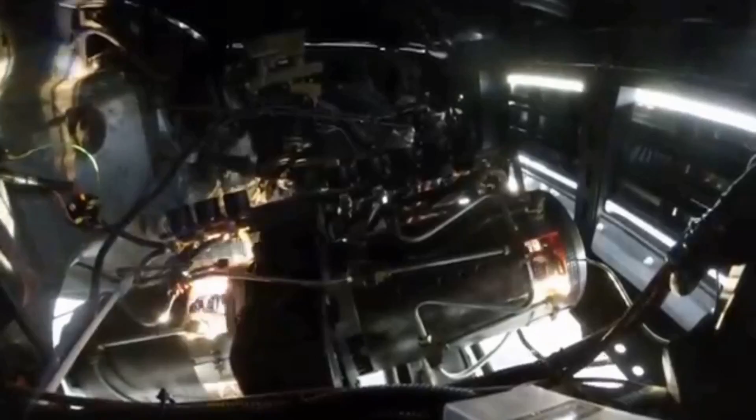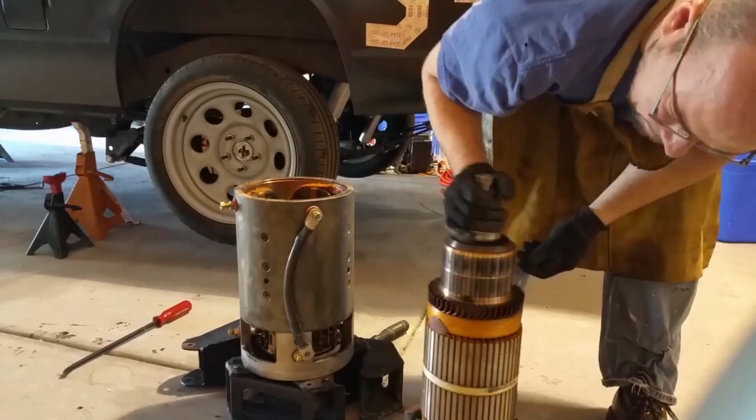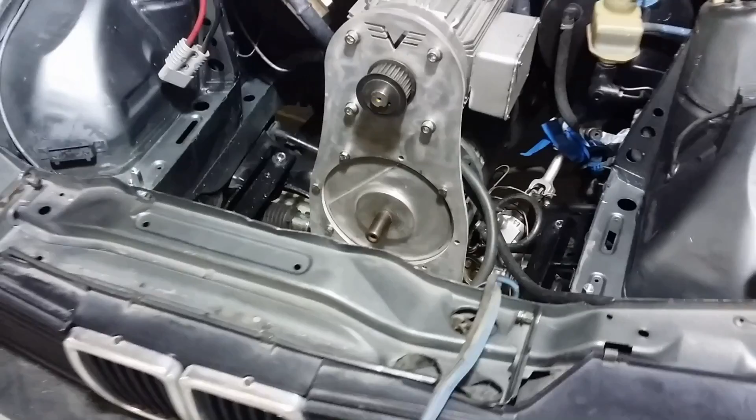Up to 600 volts. Motor repair, take one. These 4 bolts here. That shaft moves this lever. It's alive!

All right, it is here. It's a Challenger 1 long wing. Originally designed as an ultralight. This one has the 503 Rotax on it, which is a 2-stroke. I think it puts out about like 54 horsepower, somewhere around there.

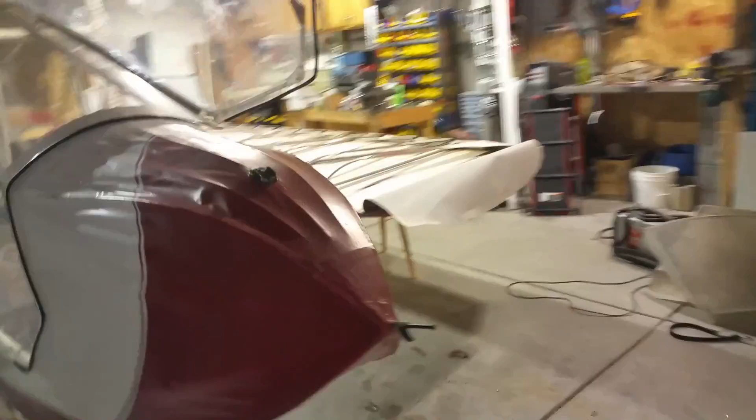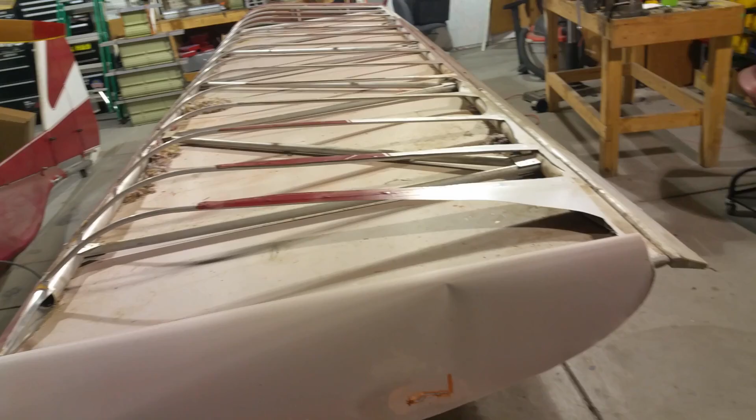Yeah, well, it's not an ultralight with that motor on. It's supposed to have a 277 if I remember right. But yeah, it's here. So put one wing up there for right now. Gonna work on this one first. Definitely a barn find. This wasn't a do a few things and get it running type situation. This is a complete teardown.

And actually I will be doing that. I'll be tearing it down to where it was as a kit and then building it back up. So all the coverings coming off. I'm gonna definitely put it on a diet. I'm gonna take off the windscreen, the doors, not gonna put that on. Obviously I'll go into electric, but I'm going to keep the 503 because I might use that for a hybrid, which is going to be a later project.

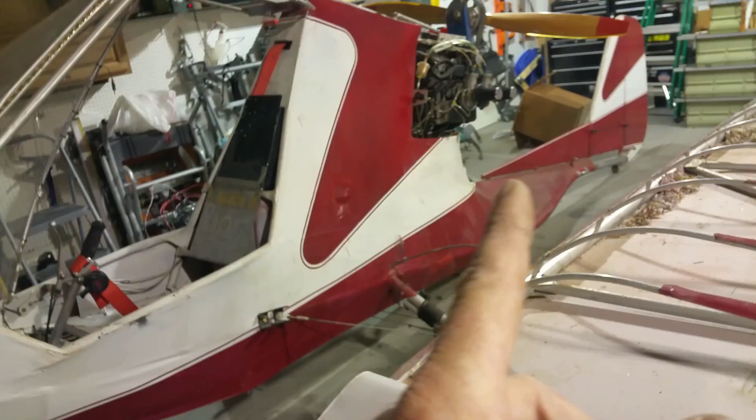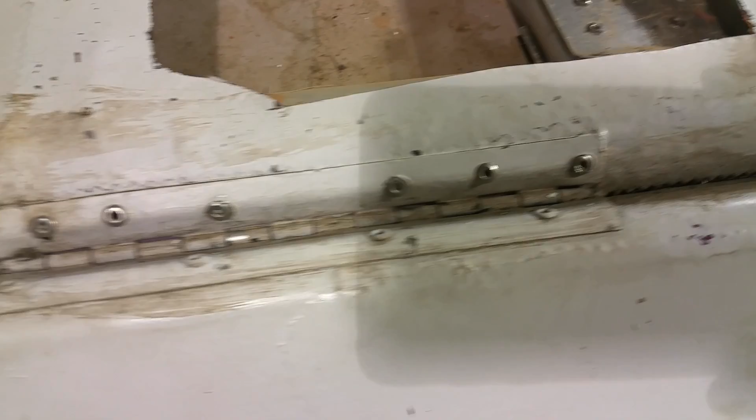This is the first step. I've got the HT back there, actually an elevator. I'm going to pull all of this off, just strip it down, do a full inspection on it. Some of it's, you know, factory drilling, riveting looks fine, and then there's other stuff where, well, not so fine. So I'm gonna put my DER hat on, as it were, and look over everything.

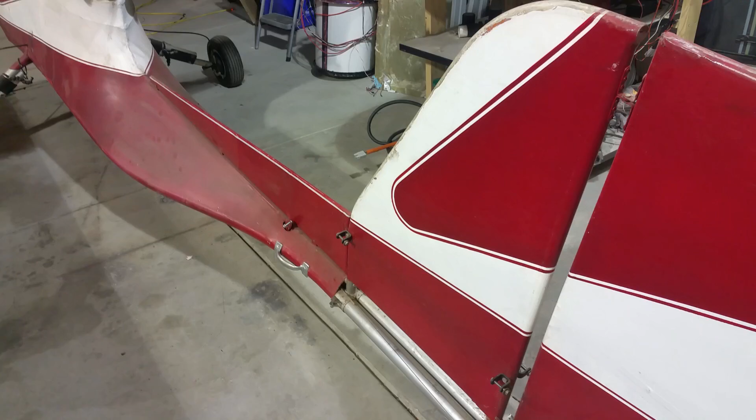Obviously this has been in a barn for a very long time, and well, rest in peace, buddy. But anyway, it looks like a POS because, well, it is a POS, but you know what, it's my POS. And I'm gonna strip it down and turn it into something better.

All right, so there it is. The surprise is unveiled. My next electric vehicle conversion video is going to be about me converting a Challenger 1 ultralight into an all-electric aircraft. This is a project that I've been wanting to build for probably around a decade now. Part of the reason that got me interested in electric vehicles to begin with, my full-time job is designing airplanes, and I wanted to build an electric one.

But especially 10 years ago, the technology was very out of reach for the average person. When I did my first conversion back in 2009, I did lead-acid batteries. Don't need to tell you that lead-acid batteries don't make an electric airplane. But I've done the past 5 conversions with the idea of building up to the point where I can have the confidence that I'm going to build an electric airplane and not catch on fire or crash or otherwise have regrets.

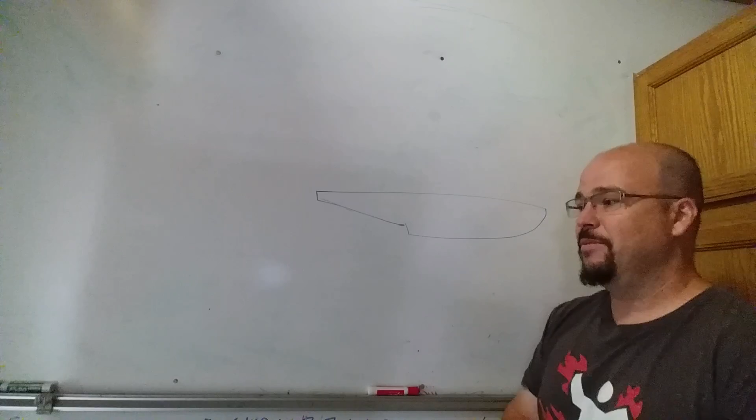I've always had a soft spot for seaplanes. I've designed jets. I've designed prop planes. I haven't ever worked on a seaplane. So again, for me, these builds are about doing something fun, but it's literally the build process, not necessarily the ends, but the means to get there.

So yeah, I want to do a single float plane, parasol wing, and the big thing is I want distributed electric propulsion. That's one of the big things that I want to test here, and why I want to go through that with a known airframe. The Challenger 1, I think something like 1,300 of them have been built. They're a known aircraft. They have a few quirks, but definitely much lower risk than me trying to design and build my own airframe.

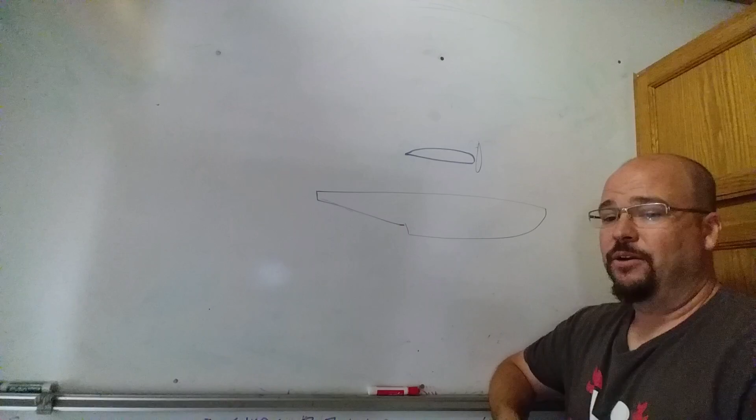Not to mention time. I've done a scratch-built fuselage before, and it takes a while. Once you start adding a lot of things together, the project can seem daunting, and that's where a lot of projects just end up dying.

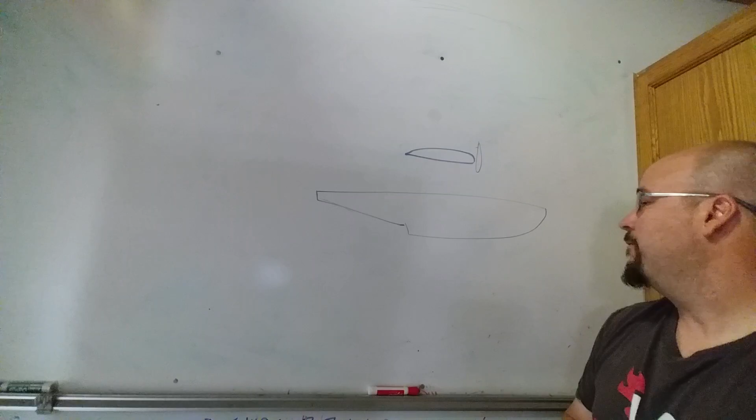So anyway, back to that. So I want to do a float plane design, conventional tail, distributed electric propulsion. For those not familiar, distributed electric propulsion, again, is not a new idea. We have a series of motors and propellers along the span of the wing. You do this for a couple reasons. One, it's actually very easy to integrate into non-conventional designs.

By having the motors out all on the wing, you don't need to have a space for it on the fuselage. In a traditional tractor configuration, you'll have an engine and propeller up front, or in the case of an electric conversion, a motor and a propeller out front. The Challenger 1 is actually a pusher, so it has a unique airframe design specifically to give you a place to put that. By going to this method, it gives an aircraft designer a lot of freedom on where you can put it. That's also one of the nice things about electrics, is that you're not dictated.

When you start designing a piston engine aircraft, for instance, or a jet engine, you'll figure out where the location of the motor is going to be, and you start working from there, because that is by far the single heaviest item on the aircraft, and it really drives the design from a weight and balance standpoint. Electric motors, these motors are very, very light. Again, this is a 2 horsepower motor. I'm going to be running about 12 of these.

Really, for an ultralight, I can only have a certain amount of power, at least for the way it's written. For those who aren't familiar with the ultralight regulations, this will be a Part 103 aircraft. It limits me on empty weight, power off stall speed and maximum cruise speed. I'm going to say the numbers, but I'm probably saying them wrong. If I remember right, it's 24 knots for power off stall and 55 knots for maximum cruise speed. Don't quote me on those. Look up the FAR regulations.

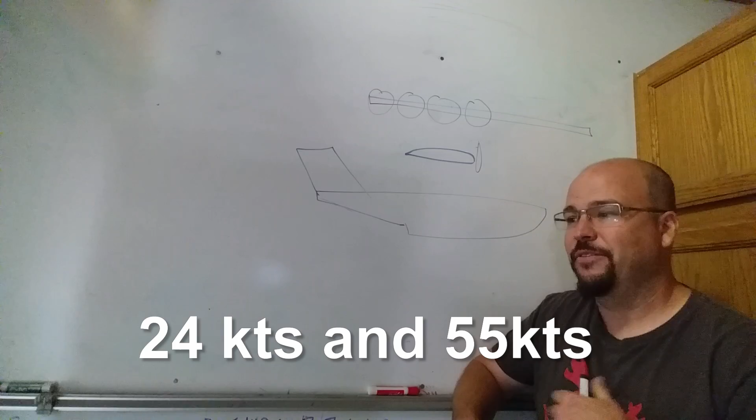The empty weight has to be less than 254 pounds. That's without fuel and without pilot. It can only have one pilot on board, no passengers. So that and a few other things are the requirements for operating as an ultralight. Ultralight gives you a lot of things that you don't have to do. I don't have to register it and N-number it. I don't have to meet some of the operational requirements. This won't have a 30-minute range, for instance. Probably looking at about a 20-minute endurance.

With a standard Part 23 aircraft, you have to have 30 minutes of reserve fuel on board, so I would never be able to take off if I operated it as a pure electric single-engine land aircraft. If you register as a motor glider, there's ways around that, but that's not what I'm looking at right now. So doing electric propulsion for a lot of those reasons.

The other big one, and it's probably the biggest one, is that you are blowing air over the wing. A wing makes lift by air going across it. The wing doesn't know whether it's being dragged through the air or you're blowing the air over it. Think of a wind tunnel. In this case, by mounting all of the propellers along the length of the wing, it's called a blown wing. You're blowing air over it, so you can make significant amounts of lift at 0 airspeed.

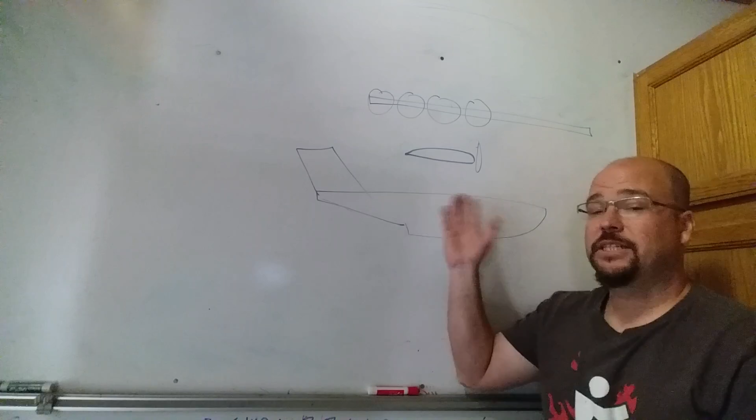Now, I'm not trying to do a crazy vertical takeoff, quadcopter, etc. This is going to be a simple fixed wing configuration, but by doing this, it gives me very short takeoff and landing performance. Now, the Challenger 1 is no slouch. I think with the 503, if I remember right, it's like a 350-foot takeoff roll. That depends on who you're talking to, and those are numbers from the internet, so take them for what they are. But I should be able to get significantly lower than that with the blown wing.

Again, this is not a new concept. NASA's been doing it quite a while, working on their SCEPTOR. Actually, now they call it the Maxwell. They're going a different route. They're going to a very small wing, because when you do a blown wing, when it's powered, it gives you a very high coefficient of lift. You can get CLs in the 6 to 8 range, depending on power and other installed factors,

which is a very, very big improvement. Going to a smaller wing reduces your cruise drag, but the problem is the wing gets small; it's hard to fit things in. But the biggest thing is if you have a power out situation, then you don't have that blown condition anymore, and so then you have a higher landing speed.

Here again is ultralight going. I want it to be safe. I'm going to be flying it. So if there is a power issue, again, the power off stall, I have to have a power off stall that's in the 20 knot range.

So if I do have some sort of propulsion related problem, it makes it a much safer event, because obviously I'll be doing this in an open, unpopulated area. I can just land if need be. Obviously, do everything I can to make sure that event doesn't occur.

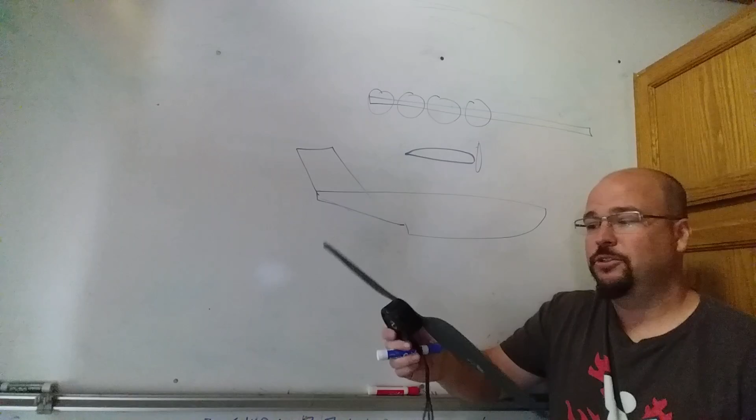The nice thing about using these is they're actually made for agricultural drones. These aren't RC airplane motors, though some people do use them for that purpose. The nice thing about it is that these are made in high volume, so the price comes down significantly. I think these are on the order of about $100 for 2 horsepower. So that means for the 20 horsepower that I want, I'm looking at about $1,000.

You need to add propeller and ESC, but that would apply regardless. So I looked at other options for doing like just 2, 4, or just a single motor, and it just didn't work out for various reasons. So I'm going to be testing these motors, as well as a whole host of other ones in a future video. But assuming that all that works out, I'll have anywhere between 10 and 14 of these motors distributed across the wing.

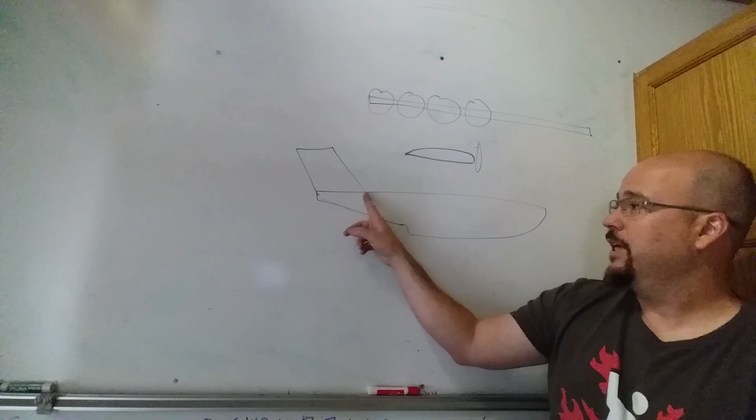Also, I'm span loading that weight on the wing, which takes some of the bending moment off. Again, these are pretty light, so it's not a huge factor. But anyway, I want to build an ultralight seaplane, but why do I have the Challenger? Well, one, I really bought the thing because I wanted the wings and I wanted the engine and propeller for a later hybrid project.

I bought it for the cost of parts, and honestly, what I got is pretty much worth those parts. It has been crashed and repaired and crashed and repaired again, and probably crashed at least another time in there. There are bent landing gear, bent struts, buckled tubes, dimpled tubes. There's a whole host of problems there. I'm still on the fence about whether or not I'll fix up that fuselage because it has so many things wrong with it. But again, I'll get into all that in a whole other video.

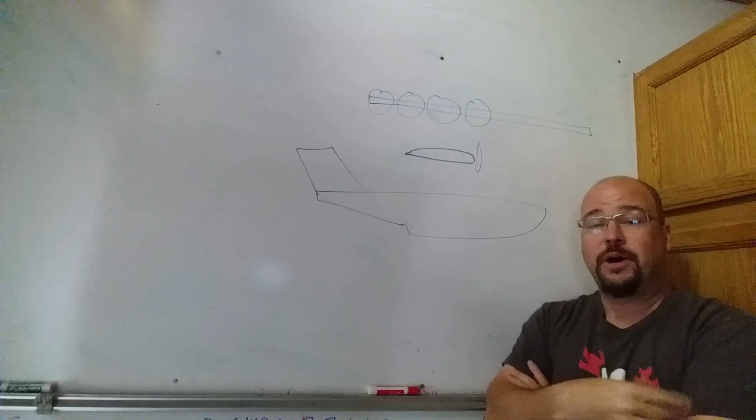But so I got this Challenger 1. Why I'm using this: later on, I'm going to be building my own fuselage, moldless composite construction. But there's a couple issues with that. One is I don't want to be doing initial flight testing off of water if I can avoid it. That literally adds a whole other element that it wouldn't be good to do for such an unknown aircraft.

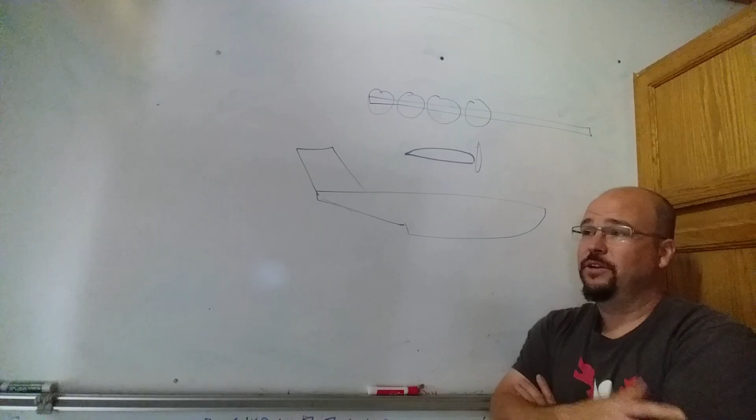The other is a practical standpoint. Colorado is the only state in the union that you cannot land or take off or operate a seaplane off of public lakes. Every other state you can. In Colorado, it's not a law. Someone just made up a rule, I guess, back in the 70s or 80s, and it has been with us ever since. There's a couple of private places I could do it, but it very much limits me being able to operate.

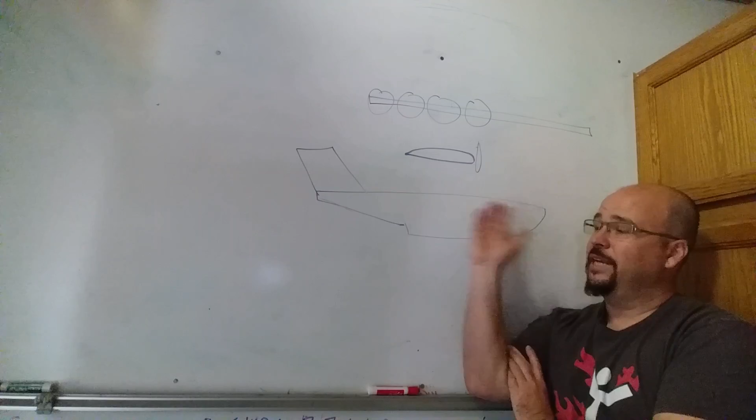And then the aforementioned, really I want to just be able to do the flight testing with a known aircraft. Really here I'm testing the electric propulsion system. Then once I'm confident with that, I will take out the Challenger fuselage, build up this, and I'll have my final end product. But that's not what I have now. So what I have now is going to be a Challenger.

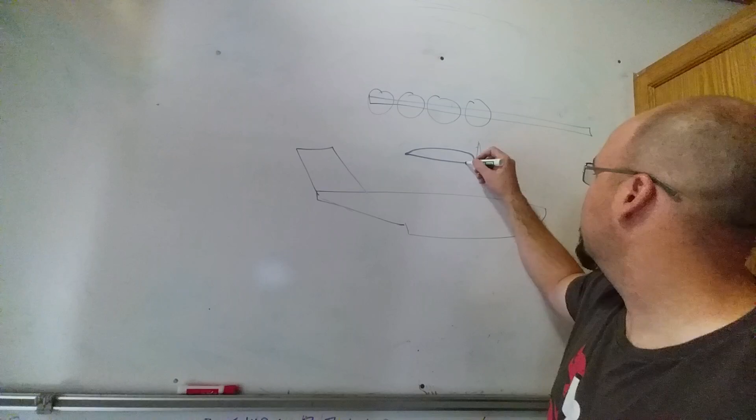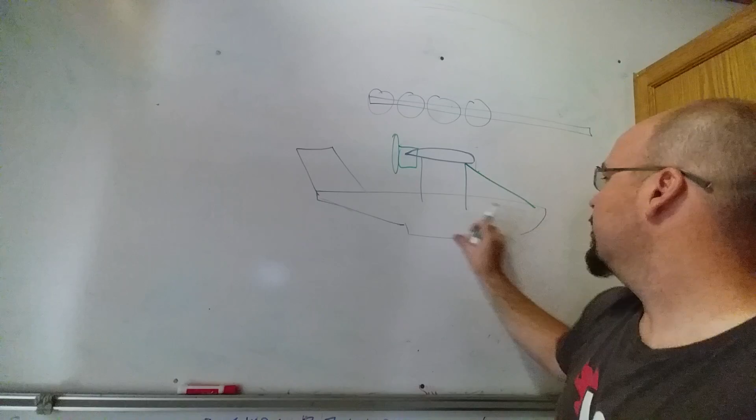So if we switch this guy over to a Challenger, we got some tubes. Let's see. Normally the Rotax gas motor is back here, and it's actually not too different of a shape. Somewhere around that. Any Challenger owners, I apologize for my drawing, but then there's braces and stuff in there. For those unaware, pilot sits up here.

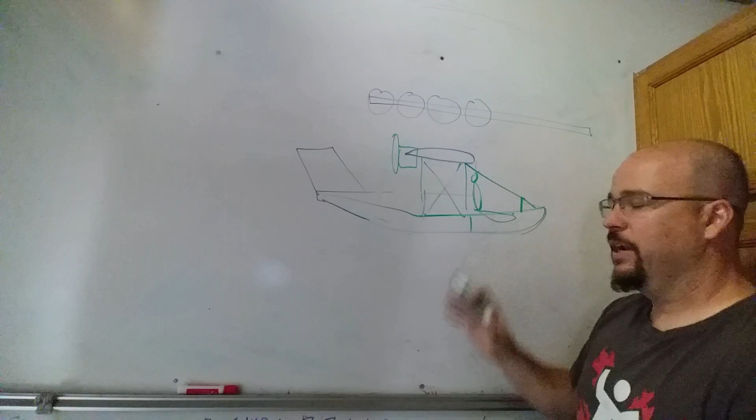So again, I'm trying to get this experience of flying. So I am up front here. The wing's a bit over my head, but there's nothing else out in front of me. If I were doing a conventional tractor configuration, everything would be built such that I'd have a firewall and a big motor right in front of me. I didn't want that. That's part of the reason for choosing the Challenger.

The other thing is that it's a very light construction. The bare fuselage with the tail on it, landing gear, pretty much everything but the power plant is about 100 pounds. I'll show you in the other video, I can pick it up just fine. And so keeping that weight down to meet that 254 pound empty weight is definitely a crucial part of it.

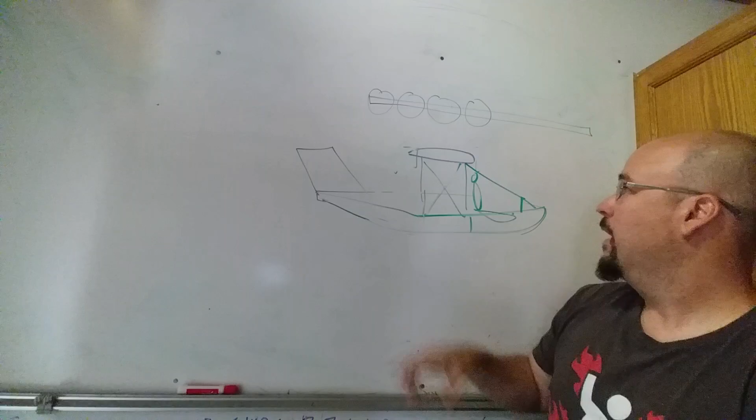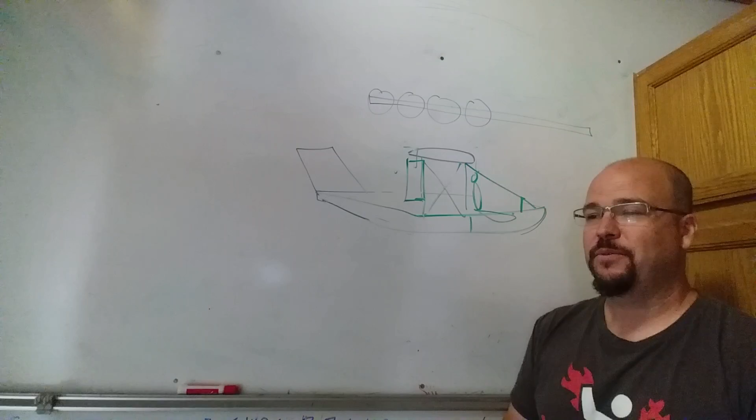So I've already removed the Rotax. Obviously if I do that, my weight and balance goes all wonky. So I'm going to put my two Tesla battery modules there. They weigh 55 pounds each. The Rotax with the motor and prop weighs about 115 pounds. Two 55-pound batteries replacing a 115-pound motor works out pretty much perfect, especially once I add the battery box and mounting. That's going to mount right where the motor did, keeping my weight and balance. I've already got structure to tie to there. It works out very well from that standpoint.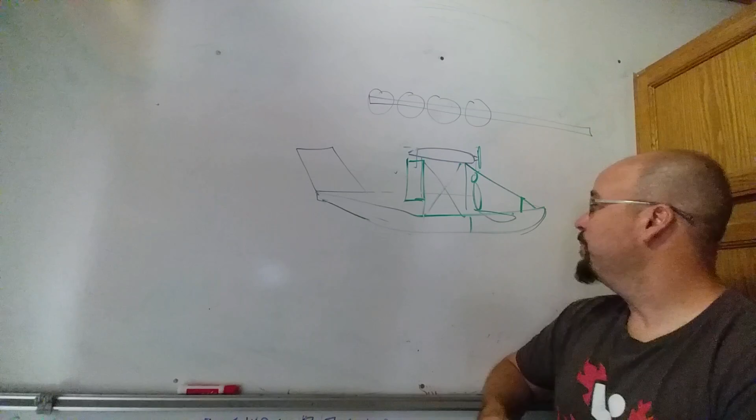The motors and propellers will mount up on the forward spar, and that's not quite ideal. I prefer the wing to either be in front of me or behind me so I'm not in the propeller arc, but I'm going to do some things to try to mitigate risk there. I'm not really worried about a blade out on an RC airplane motor, but that doesn't mean I won't consider it.

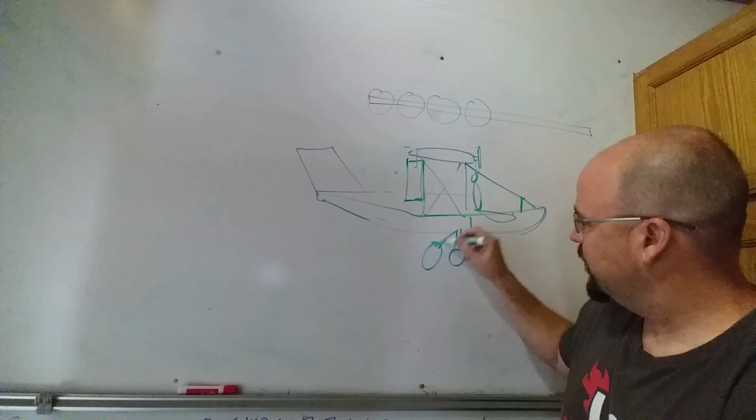So anyway, that's going to be the general configuration. But first thing I have to do is fix the airplane. One landing gear is the way it's supposed to be, and the other one is like this. This is a common problem for the Challenger - common enough that the factory actually sells a kit where you cut out the section of damaged tube, with a set of sleeves you can put in to replace all the broken parts. It kind of characterizes the weak link of the airplane.

Part of the problem was that this was a Challenger 1 Ultralight, but they were running it with a Rotax 503. They were probably operating it over gross, and certainly operating it outside the Part 103 guidelines. This plane was never N-registered. So anyway, I've stripped it all down, probably even beyond what the factory kit calls for, because I'm going to have to replace a whole bunch of tubes and do a lot of rework.

That'll be my first step, and that'll be the next video - that, or maybe some motor testing, we'll see. But I'll go through the whole teardown and show all of the, let's just say, battle scars this plane has. Again, the plane really is - if this was practical and you were going to keep it and fly it for 20 years, you'd probably just recycle this fuselage. But I think I can fix it to meet my mission.

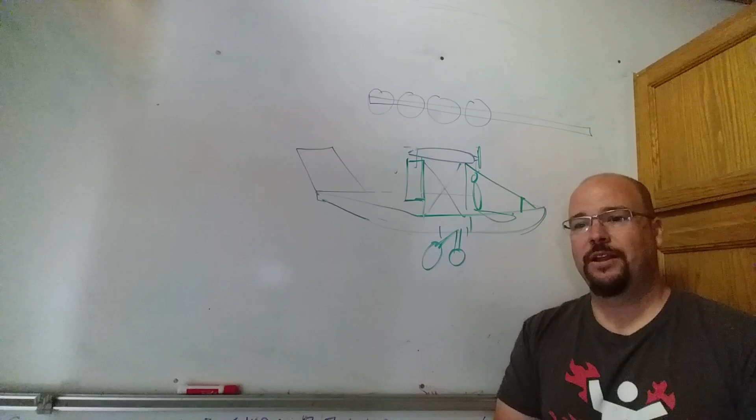And we'll go from there. Stay tuned. So I wanted to double check the center of gravity. I did scales on each wheel, but especially with a configuration like this, as light as it is, I just put a chain hoist at the CG. You can see where the CG is marked there. This is with the tail, the vertical tail, and the rudder on.

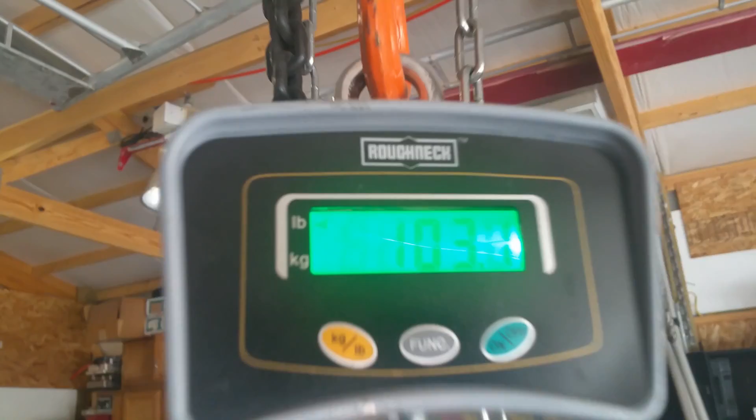All the flight controls, as you can see, are still in. Wheels, tires, brakes, rudders, seat belts - these are pretty beefy seat belts here. Seat belts are significantly stronger than what they're attached to. But if anyone's wondering, that comes out to 103 pounds.

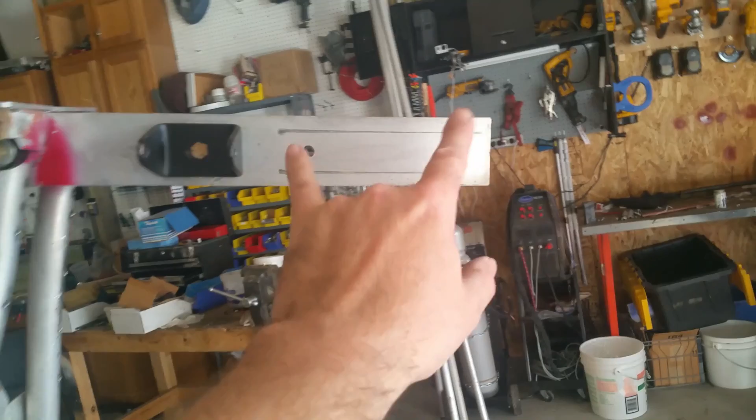And the center of gravity is right there. So the pilot sits up here to balance that out. The gas motor, that Rotax, normally hangs right here. The Challenger 1 Ultralight, which is what this is, is supposed to come with a Rotax 277, if I remember correctly. So that's going to be significantly lighter than the Rotax 503, which you can see right here.

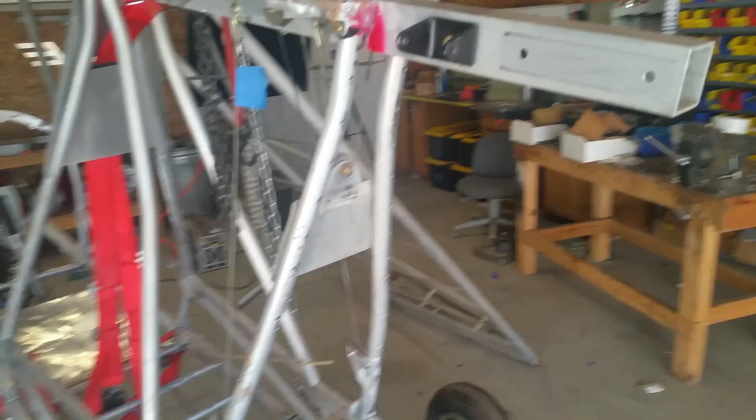But anyway, regardless, I don't know what the weight of the small Rotax is for the Ultralight, but this one was run with the 503, and I'll do the whole weight and balance. But either way, I'm going to want the batteries right about here to balance out the pilot up front. Especially since I'm not a light individual, so it's pretty much going to be right here.

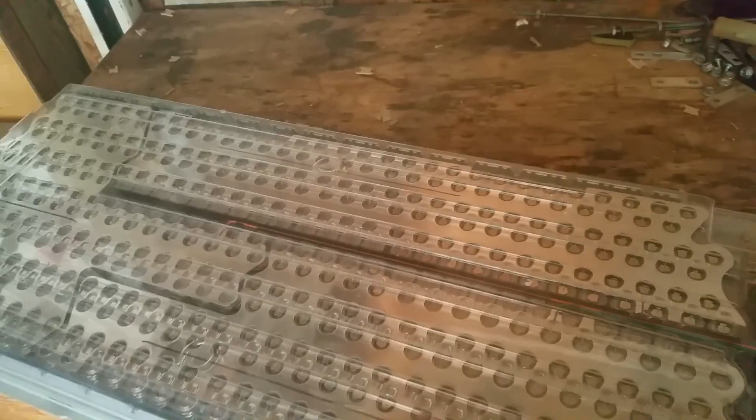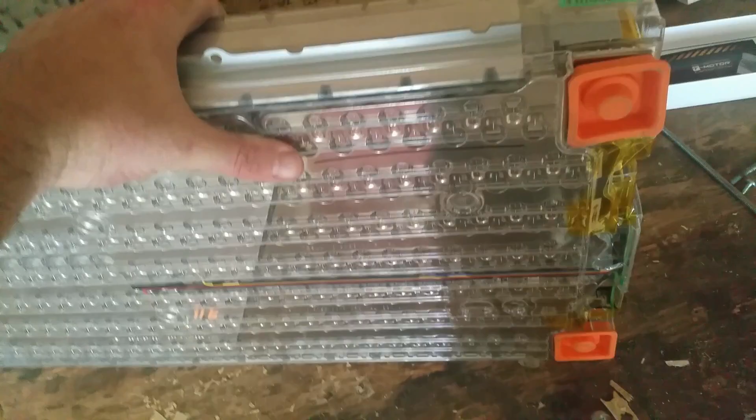And this is the battery, or one of them, that I'll be using. It's from a Tesla Model S - this is a newer one, I think from a 2017 or 2018. It's actually a 5.4 kilowatt hour pack. I'll do a whole video on testing this pack, making the factory BMS work, as well as building a battery box.

But like I said, I'll do a whole video just on that. Tesla does use limited liquid cooling, which is just fine for the size of pack it has, but I will be reusing that liquid cooling loop because I'll be operating these batteries near their continuous rating, so I'm going to need to give that residual heat someplace to go.